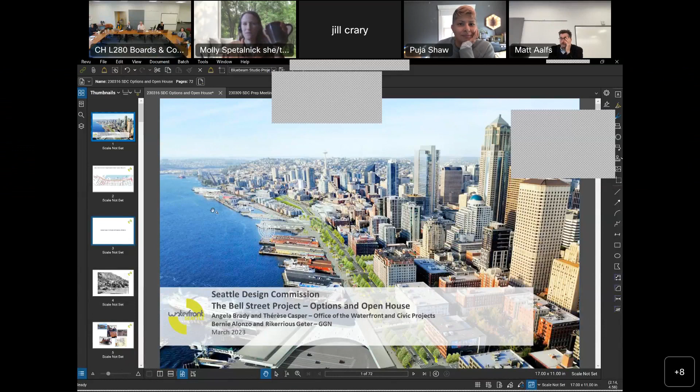And you're a presenter with various access, so you should be able to share your screen. About to do that, right? Says I'm sharing, but do you all see it? Wait, okay, there it is. It just took a minute. The room had to take a pause. All right, well, we can get started.

My name is Rikerrious Geter, and I'm working with Bernie to design some concepts with the community for Belltown on Bell Street. We used this presentation when meeting with the community to remind them this was part of the larger central waterfront improvements, and Bell Street is that last leg, as you see to the far right of the screen.

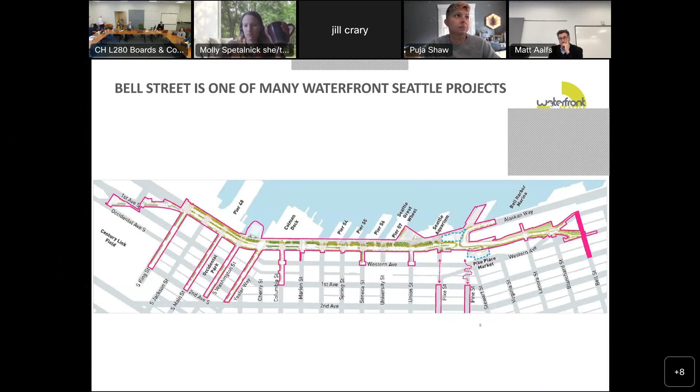GGN started on the project when there was a different framework for what the project might be. Reaching back to pre-COVID times, we interviewed for a place that was also potentially going to take on the portal site and be a neighborhood park. Subsequently, there was discussion and negotiation between the city and Seattle Public Schools, and there's a city-owned parcel that may become a school. While that decision is being made, with maybe a 10 or longer year time clock on it, our project became fully focused on Bell Street from First to Elliott.

One of the things we wanted to start our process with the community was not coming in with prescriptive design ideas, but wanting to hear from them, while also letting them know what we saw as things that resonated with us about the community, about the place, and about Belltown.

Our basic theme is that every place is thick with small stories. The idea is that this place started with humans thousands of years ago, with an active indigenous population that transited from Elliott Bay through to Lake Union, aligned more with where they eventually built the portal, where there was a ravine. This is the beach side of that ravine.

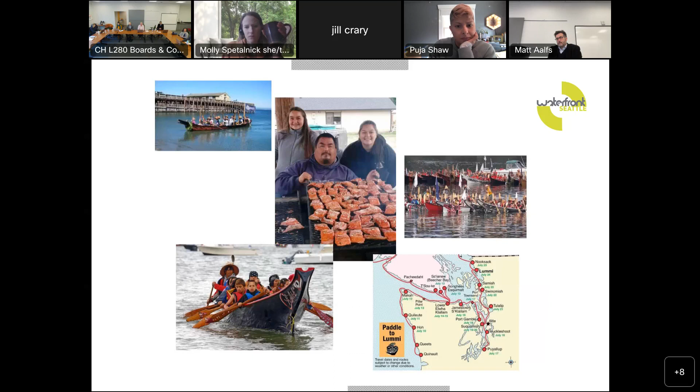As we go upslope, thinking about the modern context of our indigenous folks, we wanted to make sure we acknowledged them and their rich history, and potentially looked for ways to include that history, present and future, in our planning, as that resonated both with existing residents of the Belltown community and indigenous folks. We can get into that more as we discuss some of the design options and elements that may be brought forward.

There was also the history of the viaduct itself, and a passionate group in Belltown really wanted that sign bridge saved. It has been saved—it's in a yard that the Office of the Waterfront, SDOT, owns—and we'll be looking at repurposing and resiting it on the property within the project.

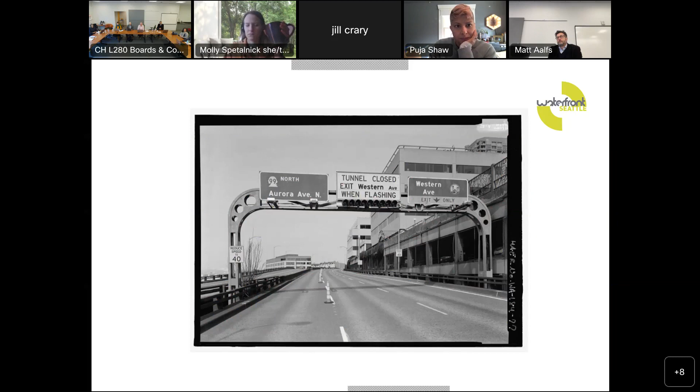There's also a great history of activism. This slide shows some things that were still standing and still up for activism at the time of the original presentation, but there's a wonderful scale and history of community activism and involvement in shaping the future of the neighborhood. There was a residential scale, a very local, human-scaled presence of people in this space, and we always wanted to reach back to and recognize that.

Taking advantage of the fact that we're on the bluff side looking down, but really wanting to come back to the opportunities to connect the neighborhood to the waterfront. As it's turned out, from the community we've heard it's also very important that they feel seen and connected to the activities on the waterfront. They feel that's critical to the vibrancy of the neighborhood and the commercial success, and to rebalance the street daytime and nighttime activities that occur there.

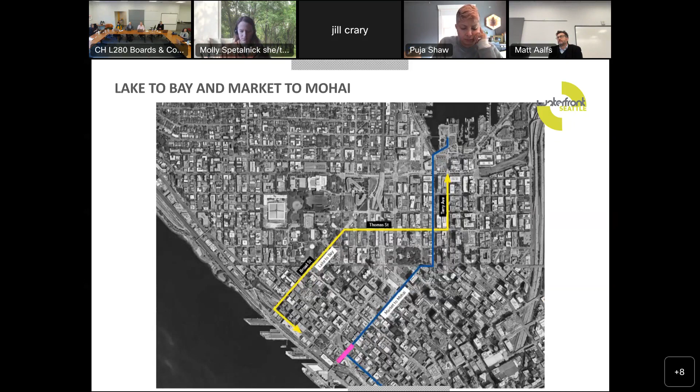These two blocks, particularly the block between Western and First, are on the already developed and evolving Market to Mohai connection. There are other connections real close in the neighborhood. We brought that up just to remind everyone that we can look at two blocks in isolation, but we would never want to lose the context and the possibility of larger connections.

So I would jump into the site overview. When we were meeting with the community, we tried to really orient them to why we are here today. We talked about the history of the Alaskan Way Viaduct and how that in a way separated the neighborhood from the waterfront.

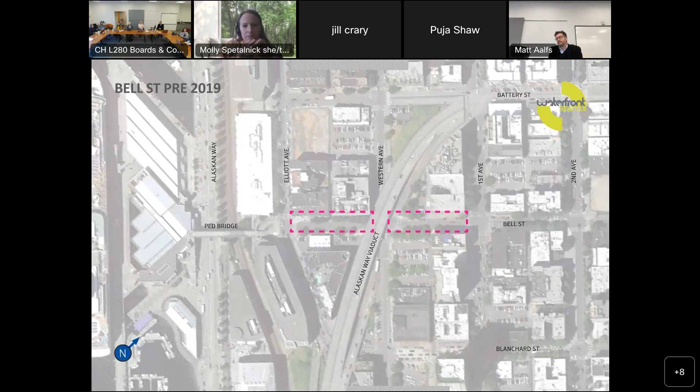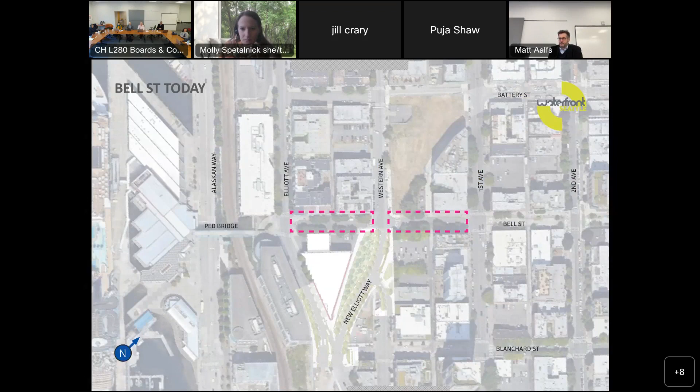The ongoing work with the waterfront is working to improve that relationship down the hill to the water. As we can see today, the new Elliott Way comes and meets Western Avenue at Bell Street, and that creates an opportunity to really make that intersection special. If you're standing further south, you can see that vantage point up and through into the neighborhood. Looking down Bell Street, it's a lot more open.

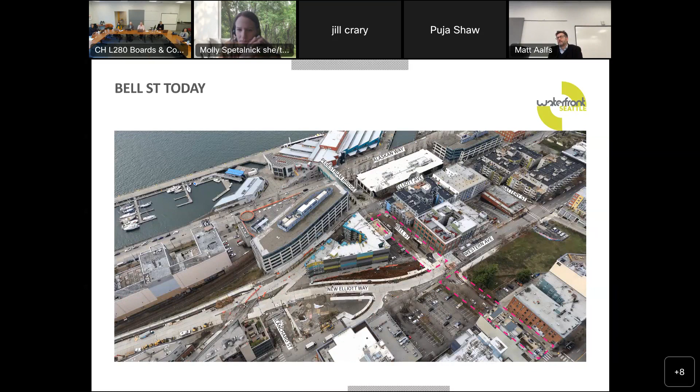We have a little more of an invitation down to the water and Bell Harbor Bridge. We shared this aerial bird's eye view of some of the progress that was current two months ago—there's been a lot more construction since. Ultimately we used this diagram to show the scope of the project and what was within it, what we were looking to improve.

The first thing we did was orient everyone to the circulation present today, because within the scope of the project there is some realignment happening in terms of where cars can go and turn. I could go through this diagram, but I'm sure a lot of you may know it already. Ultimately, this is a two-way circulation for vehicles, and as Therese mentioned earlier, it's turning into one-way to feed Western, which we'll diagram in a moment. In addition to two-way traffic, the right-of-way also has two sides of street parking, so we've got all of that curb-to-curb dedicated to cars.

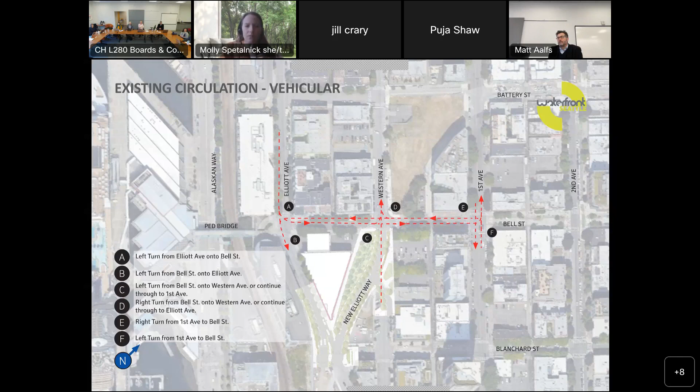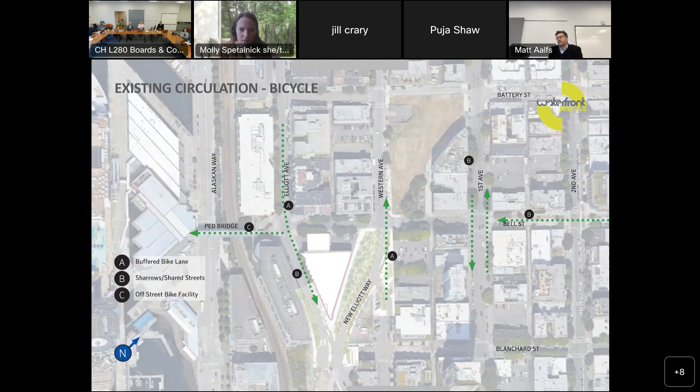Existing circulation includes good sidewalks on both sides of the street and crossings. There's some existing bike infrastructure, whether buffered bike lanes, sharrows with shared streets, or off-street bike facilities, which we're referring to as the Bell Harbor Pedestrian Bridge—showing the biking options within the neighborhood in the context of this street, and how that combines with all those different circulations working together. As mentioned, Bell Street is turning into a one-way street to feed Western, which is a couplet to feed into Battery.

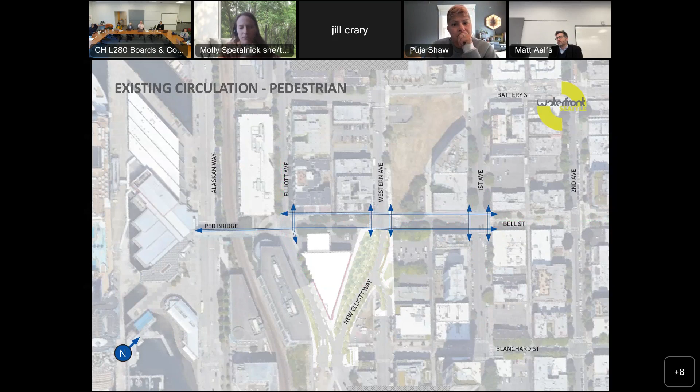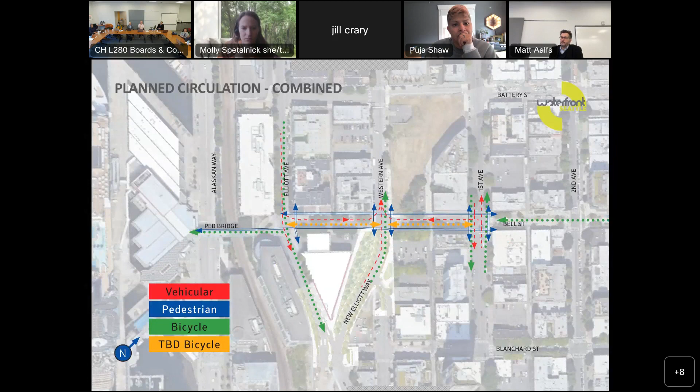So this diagram shows more of the circulation, and as I was just mentioning earlier, Bell Street is feeding into a couplet to feed Battery, which is also one way, and more neighborhood context of circulation.

Can we just add one more thing to that? Sure. So Bell and Battery are couplets, and Western and Elliott are couplets. So there's a lot of couplets going on in the neighborhood.

I think this bigger view of the vehicle circulation is important because there's a lot that's changing south of Bell Street, as you know, with the construction that's underway right now. And there's going to be a lot of change once everything reopens.

It's going to add one more note there. Just keep your eye on the open space that's on the right, on the east side of the triangle shaped building.

Our design proposals want to take advantage of the fact that there's a 120 kV Seattle City Light line there. That will keep that from being a future development site.

Karis will get into the development potentials around here, but if you haven't walked this transect in a while, even if you think you're familiar with this area of Belltown, with the viaduct down, with the portal tunnel bridge in, and all of this starting to come together, it is so fundamentally different than it has been. It's really hard to understand.

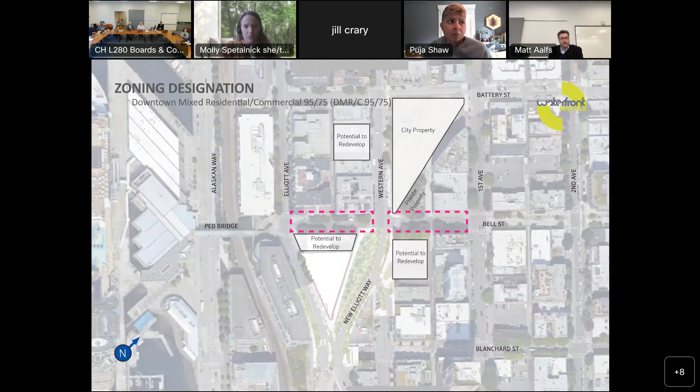We wanted the community to take into account the rare mature street trees that Bell Street has here. There aren't many streets in Belltown or downtown Seattle that have this quality of street trees, and so that was something that we thought the project would want to protect.

In addition to the pedestrian level street lighting, not many streets have that. As Bernie mentioned earlier, the historic sign bridge structure, looking into how we can incorporate that onto the site via a gateway into Belltown, to help pull pedestrians from the waterfront to go into Belltown and explore more about it.

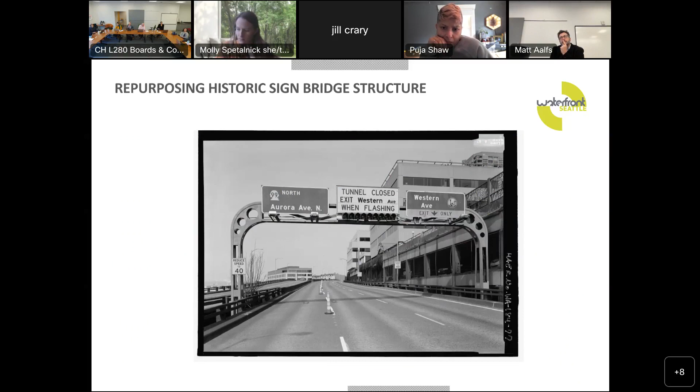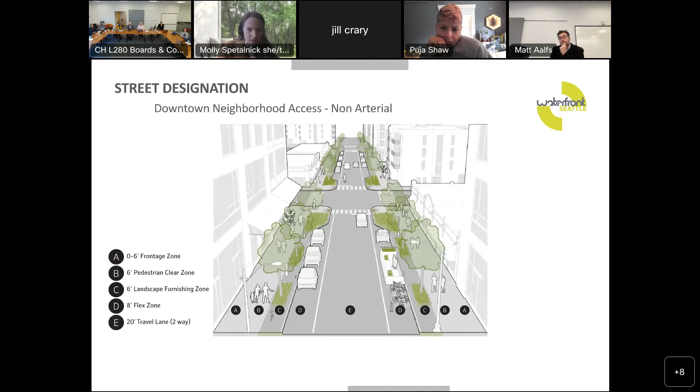We also reminded the community of how the street is designated. So it's downtown neighborhood access, non-arterial, which sets the widths of sidewalk, furnishing zones, and flex zones.

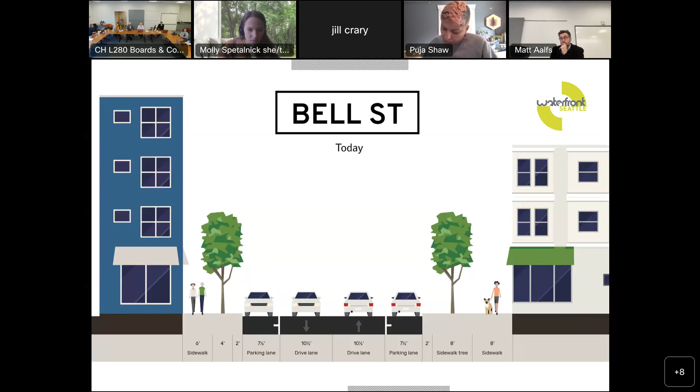We used a few sections to help illustrate what we were trying to achieve. Today Bell Street has a 66-foot right-of-way, with parking on both sides and two-way traffic. We're looking to reduce parking and a travel lane. We showed them that you could get 20 feet of additional space with those improvements, and if you remove parking from both sides and remove a travel lane, you could get about 26 feet. The community really liked that.

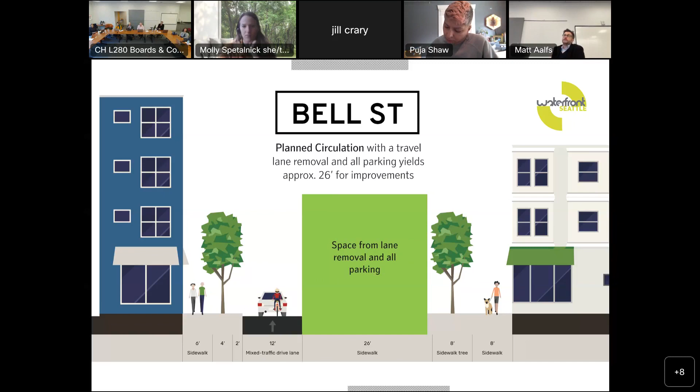Obviously, they wanted to see no cars on the street, but the options we studied were a combination between what you see on the screen and this one. Not everyone wants no cars — we are hearing that strongly, but it's good to recognize we also have people, including some who live on the street, who were at the Belltown Community Council meeting, who want to make sure they can get out of their parking garages and allow for some load/unload on the street. So we're getting a lot of desire for less room for vehicles, but also a recognition that there needs to be some circulation for vehicles.

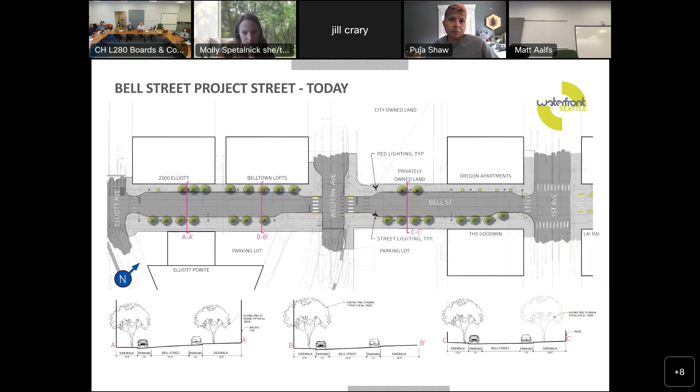Just to have a point of comparison, we are showing Bell Street today, as you can see — a 66-foot right-of-way with parking on both sides of the street and two-way traffic.

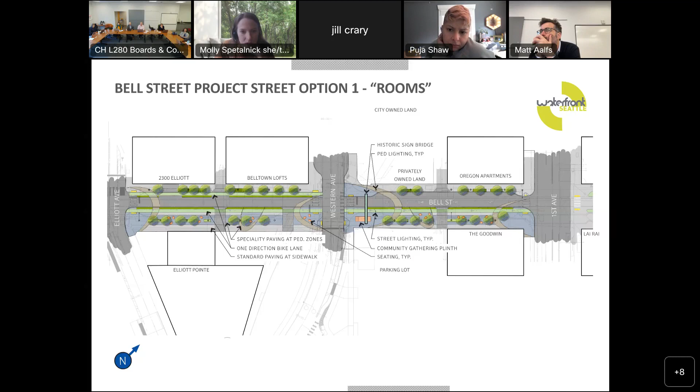Just as a reminder, from First to Western is downhill one way, and from Elliott to Western is uphill one way. So we see a climbing lane is necessary, and we're functionally working with SDOT cycle experts who located the downhill segment for that second segment across the street on the north side. In that instance, we have another option as well.

While we're talking about the steepness of the streets, we heard regularly from folks that this isn't the steepest street in Belltown, but it's also not the flattest. And as a connecting street to the waterfront, there was a group of folks that really wanted us to focus on design for the elderly.

As Ricarius said, it's not really within the scope of the project to regrade it to modern ADA standards. But what they asked for were moments to rest, which explains some of the seating up and down the slopes, and also to integrate handrails. That'll be common to any of our design solutions, but we haven't gotten to the point of detailing those. I just wanted to highlight that.

This option also shows a planted buffer between the bike lane and the street. We intentionally left it off the second option, which you'll see next, just to see how the community valued a planted buffer versus a raised buffer.

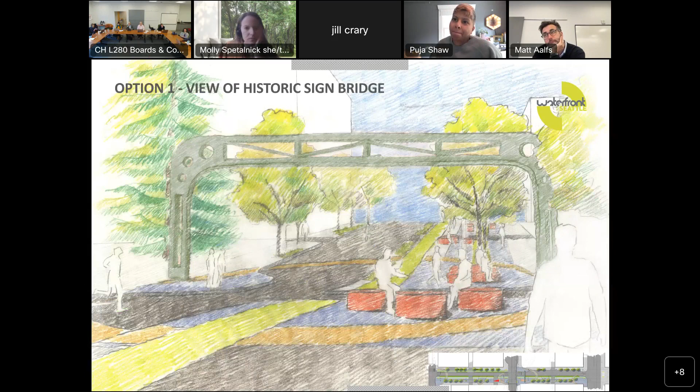And here's a hand sketch of that community gathering room at the intersection, really highlighting that historic sign bridge. When we were meeting with the community, they were pretty excited that we were showing this. There's enthusiasm about, oh, can we light it? Can we put a big sign on it that says, 'Welcome to Belltown'?

Because a lot of what we heard from some of the business owners was, how do we pull people from the cruise ships into Belltown, come to our shops, come to our restaurants? How do we create an invitation? This project will work with the waterfront to continue that wayfinding signage program that exists, so we think some of that will also help people move up the street into Belltown.

We also heard comments from the community meetings asking why we put all the attention on the southern side of the street, since most of them walk along the northern edge. That made me think maybe we should do more seating also on the northern edge, just to balance the two sides of the street. But we will look more into how we can achieve that.

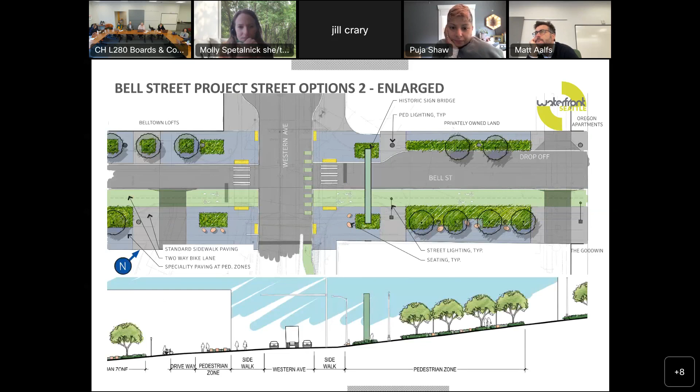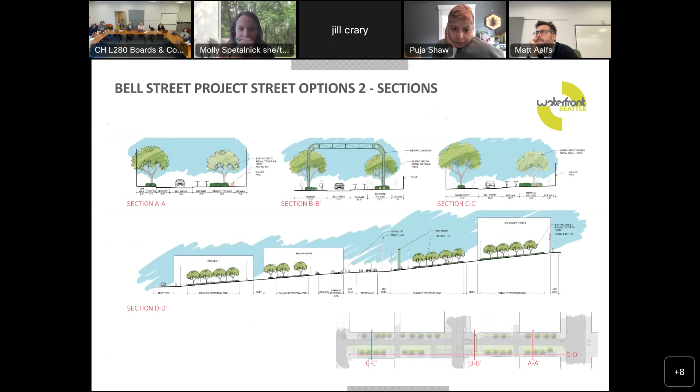And here are some of those views, what they will look like. I think this view when people saw it, they were like, oh yeah, this makes sense—I think this was when they understood how they would use this versus the other one.

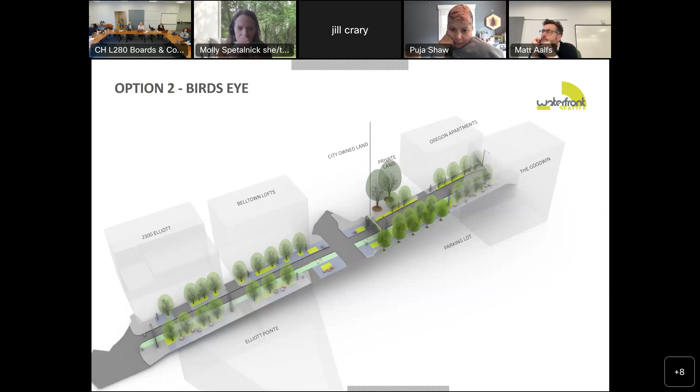The axon view, a view from the Bell Harbor Bridge, and a view of that central intersection zone.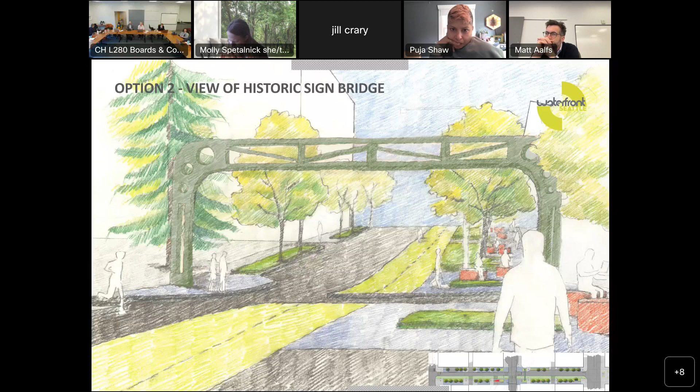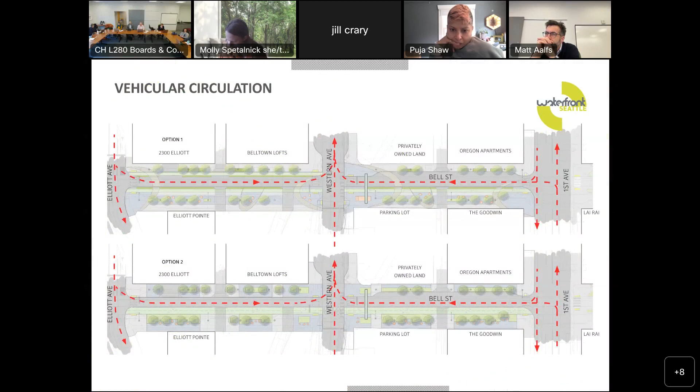Just to recap, vehicles circulate one way on Bell to feed Western up to Battery as couplets. We are enhancing pedestrian circulation. In option one, on the southern edge of Bell Street, one could walk along the building face or along the bike lane face, so we're increasing that circulation.

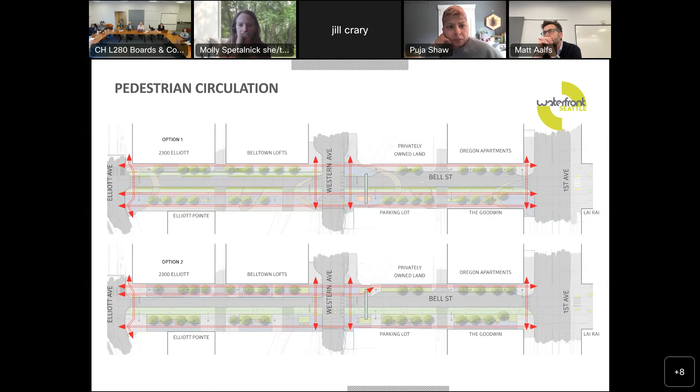In option two, since we're widening the bike lane and widening the planting, the southern edge of the street only has walking along the building face, and on the northern edge of the street we kind of double that—you can walk on either side of the trees and planting. This shows the general increased pedestrian space that the options provide, and it's generally pretty much equal.

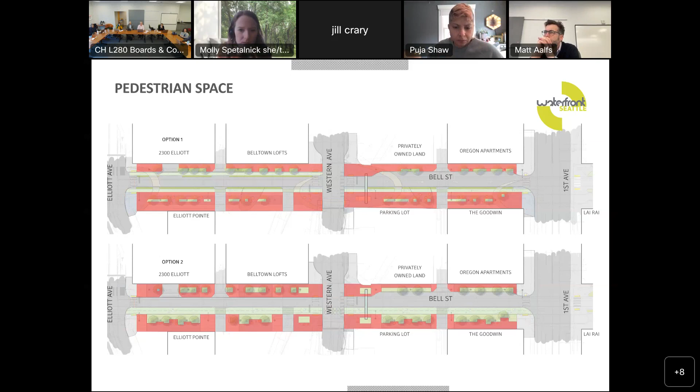As you can see in option two, there's a lot more planting being offered, which was also a theme we heard from the online open house—that people generally like to see more planting. Both options show an increased amount of planting, but option two just shows a lot more.

This diagram is showing seating. We're showing small gatherings of seating because we were trying to figure out if people wanted individually dispersed seating or these larger seating moments where a lot of folks come together. What we heard was a balance, or a mix, of both.

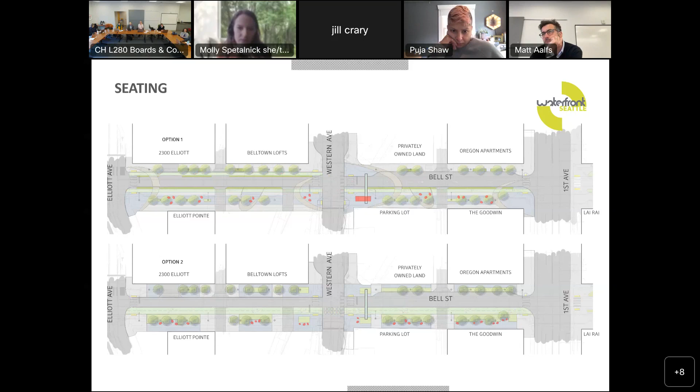Looking at the sun study for the spring equinox, most of that sunlight is in the intersections, because there are no buildings or large trees blocking it. That's consistent in both options since that's just what the sun is doing—it doesn't really impact that. For the summer solstice, you can see a little more sunlight popping up on the northern edge of the street. For the winter solstice, there's less light, as we'd assume.

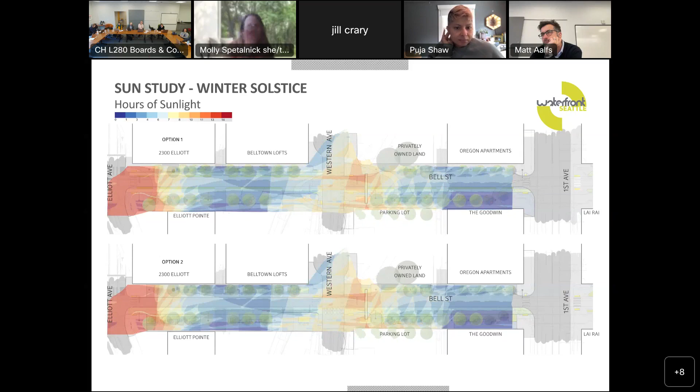So in summary, we paused here to get a read on what the community was feeling. A lot of them felt like both options were addressing their priorities. We did hear, as I mentioned, a stronger desire for the two-way protected bike lane. They understood that grading revisions aren't really feasible.

We asked if lighting the seating was important, or if lighting the sign bridge was important. They mentioned that lighting the seating was more important, because it's tougher to install seating and then change your mind about adding lighting later, versus the sign bridge—you can come back later and add lighting to that.

What else did we hear? Well, we have a summary that covers that.

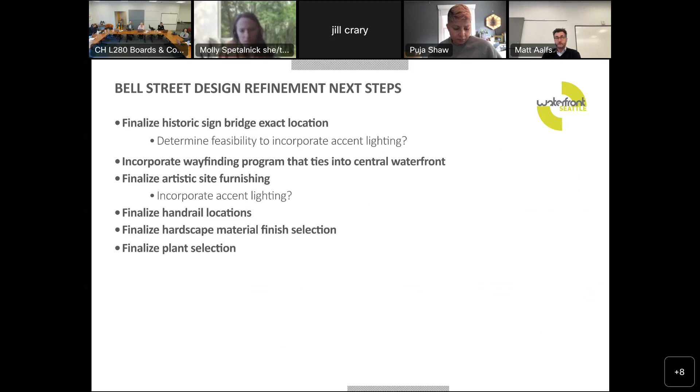So next steps are to finalize the exact location of the sign bridge, determine the feasibility of incorporating accent lighting, incorporate the wayfinding program that ties into the Central Waterfront's program, finalize the artistic site furnishings, finalize handrails, hardscape materials, and plant selection. And then there were a few questions that we asked.

We asked: do you feel like these concepts reflect your priorities? Then we reminded them what we heard—more space for pedestrians and cyclists. Our concepts show bike lane options, whether a two-way protected bike lane or a shared bike lane with a planted buffer, plus different seating configurations, gathering spaces, and additional greenery.

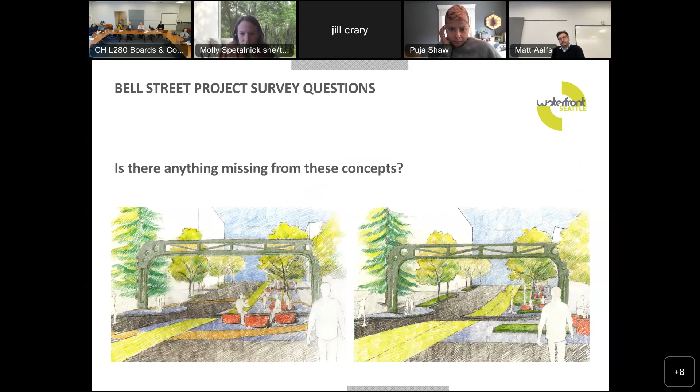And then we asked, was there anything missing from the concepts? We had our meeting with the community on March 8th, and we're still receiving feedback, but so far we've had 210 responses, and 50% feel their priorities are reflected.

Majority of the comments that say their priorities aren't reflected come from those who feel they don't want non-local cars on the right of way, on the road—that contributes to the other 50% who feel their priorities aren't reflected.

51% of people say they'd like to see pedestrians prioritized more. 33.8% think the balance is good. 15% would like to see cyclists prioritized more. A majority want more greenery. 63% prefer a two-way bike lane. And people rated the gathering space highest, 3 out of 5.

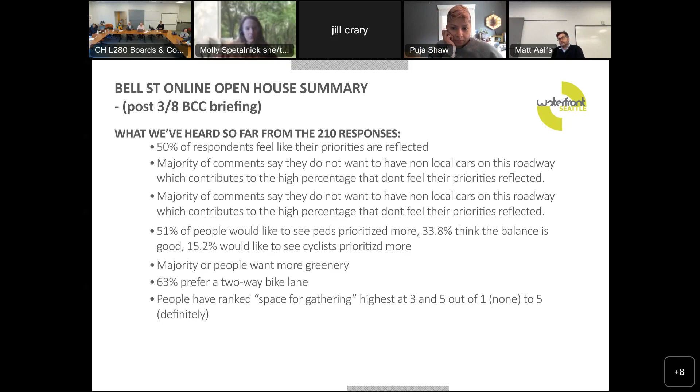Suggestions for what's missing included: a playground—though we probably can't do that in the street—interpretive signage, bike racks, accommodation for dogs, more lighting, and handrails. We heard there's too much impervious pavement, and folks wanted clearer options for scooters, meaning parking for the scooters you can rent.

So our next steps were to present to you today, refine the concept based on the feedback we've received from you all and continue to see from the community, and provide an update at a future community council briefing, which hasn't been scheduled yet.

We're thinking August. And then I thought we were thinking June. That's right, June, that's right. We thought August was too late. They said August—I'm like, that's too late, right. June. And we plan to reach final design in late 2023 and start construction next year.

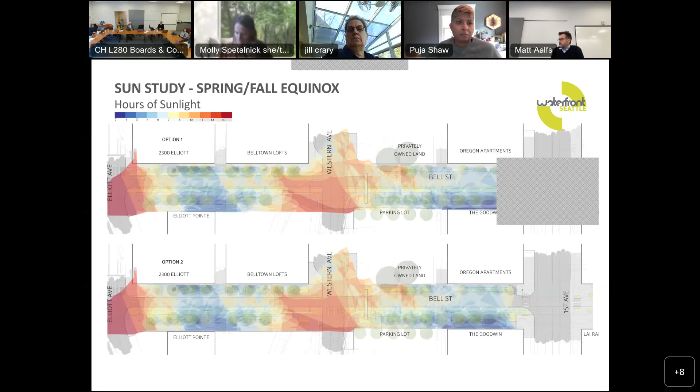Is that something that you would, actually this is kind of an overlapping question, I'm wondering how long your community involvement will occur, and is there something about seating? It seems like seating interests me because for so long, and especially in Belltown, seating has been separate, kept away. I'm really thrilled personally and professionally that you're concentrating on seating, and I also think it's a challenge, it's a strong element of what you're up to. So is this something that the community could stay involved with going forward? Because there is a history of that in the neighborhood as well.

I'm not sure exactly what you mean when you say the community being involved going forward with the seating, but I think as we define, we'll get more specific about where the seating could go. And so yes, I think that would be something we would definitely want to do in consultation with the community.

I mean, we heard that same tension at the Belltown Community Council. I think people want seating, but then all the seating got removed between 1st and 5th because of what was happening. Especially as we're coming out of COVID and people are out and about more, I think it's always a tension and something we have to be strategic about. But we don't want to not do it. So I don't think you will see as much seating as what is in the concepts. I think we put all the opportunities on there, but we will scale back and be more strategic as we move forward with the design.

But once we've developed a concept and advanced it a little bit, we will go back to the community, and then we'll probably go back again towards the final design. So that's our typical community involvement process.

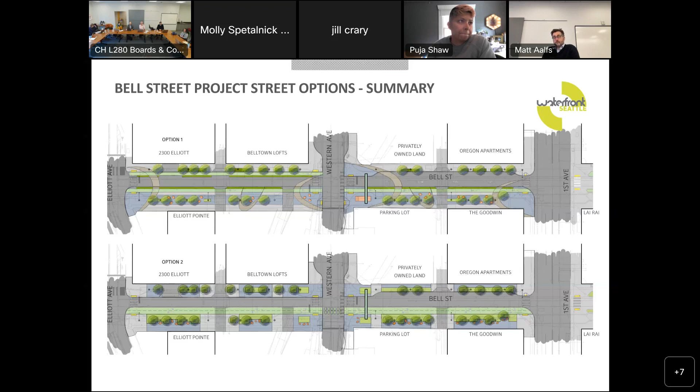When you say an entrance, are you saying an entrance at First or an entrance at Elliott? Either, but I think more so at Elliott, that you would be entering into sort of this continuation of a Bell Street experience. Yeah, I guess I would say I don't see that there's just one entrance, because if you look at that diagram, part of it is there's streets that now exist. They've now been built and they'll be opening soon.

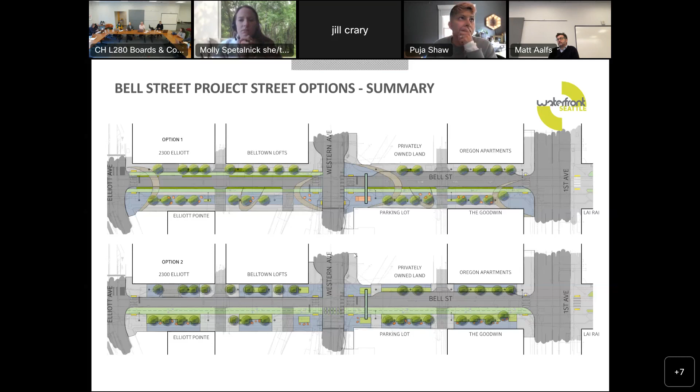That new connection on Elliott has never existed before. And if you walk down there today, that really feels like a grand entrance to Belltown, to me at least.

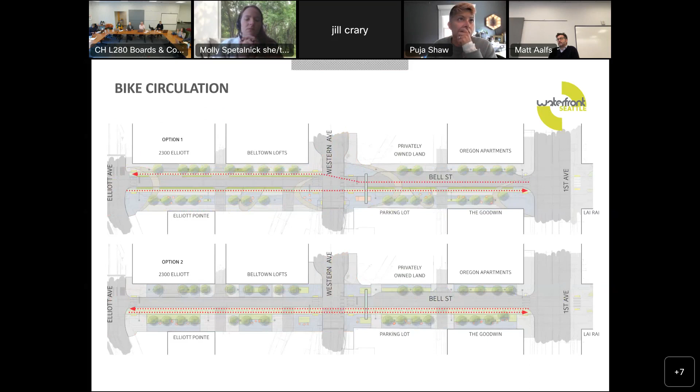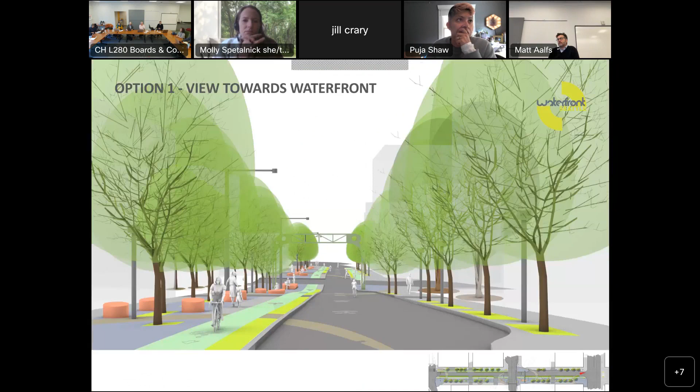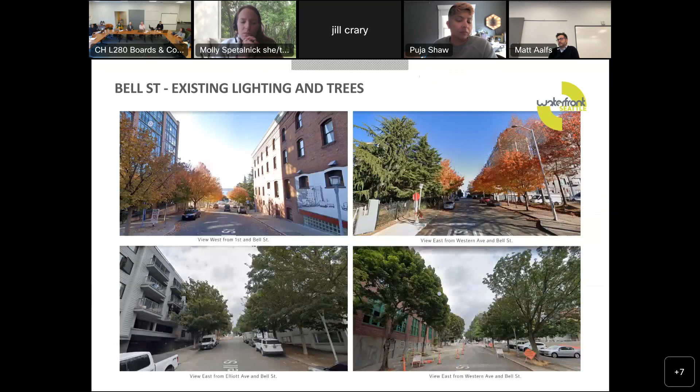So I hear what you're saying as far as it feeling like it's mid-block, within the two-block area. But I think if you're coming from Pike Place Market, that is actually where you'll be coming from, and there's a real desire from the community to draw people from Pike Place Market to Belltown. That would be Western and Elliott, that new roadway, where people would be coming from. So there's multiple entrances and multiple ways that people would be coming to the street.

That's the pedestrian-focused one. That would be alright, that was gonna be your answer.

You can see there's a lot of new bike infrastructure that also goes past there. And it's an area where that side of the street, the foundations avoid the Seattle City Light underground transmission line, so that's a more tabled area. When you go up to First, it does present a great end view if you're on the other five blocks of Bell Street, and then the road breaks down away from you. But it's right at the edge of that precipice — the street and sidewalks fold down very quickly from that intersection. So as it moves just a few feet, it's moving down at 6%, versus as we pull it up from the Western intersection, it moves up in prominence.

Part of this too is to get it to the right height, so in addition to needing vehicle access for the driveways and alleys, emergency vehicles still have to be able to use Bell. We need clearance over that, which I believe is 13.6 or 14 feet — I'm sure we've got a civil engineer who can correct me precisely — but we need to get it high enough above the roadway there.

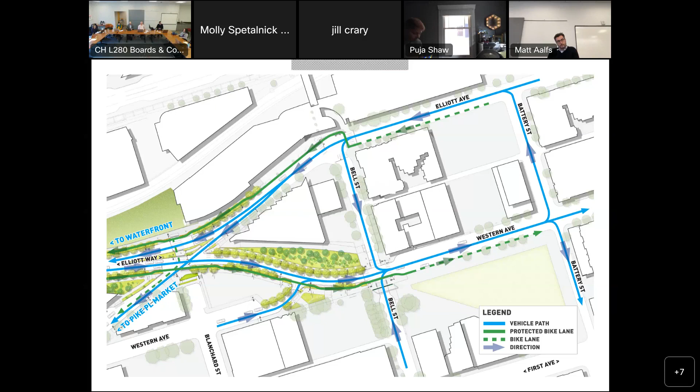It's just so hard. I was actually talking to someone recently, and we all go to other cities, and other cities have all of these things, and then we come back to Seattle and we don't have them, and it's like, why can't we have nice things, right? So I think it's a valid concern and question, and I think we're just trying to see what the interest is and what is something we could do, while also not completely ignoring the issues.

We should be able to sit out there and enjoy all this new infrastructure, the sign bridge, and the view. So we're hopeful that we can come to a solution that is a balance.

It's great, and I appreciate it. You've got to start somewhere, so it was more just the great answer.

I had one kind of odd question. You said nooks and crannies, and then you said you shouldn't say crannies, and I was wondering what a cranny was. Yeah, I think I've heard my grandmother say that word. Muffins have nooks and crannies, right? Yeah, I was wondering if I wasn't supposed to say that. I think my reaction when he said that is, when we're talking about safety, talking about nooks and crannies is probably not good framing. Bad guys are in the nooks, exactly. Okay, fair enough.

Anyway, thank you, I'm excited to see it develop. I don't have any questions, I just reserve for comments.

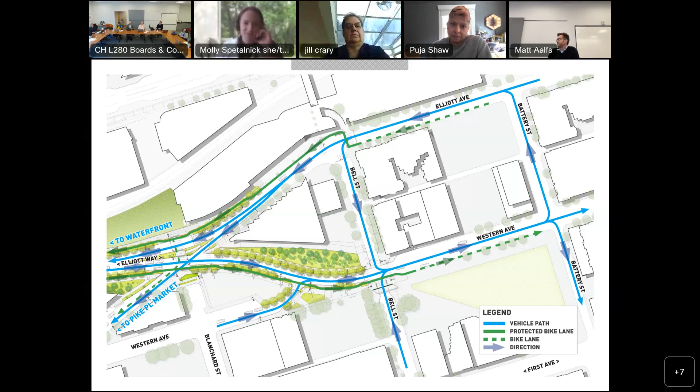So I just have one question, a quick follow-up to the curbless question, because I had the same question. This might be hard to answer, but in terms of your public outreach, was there a strong preference to pull any design elements from the 5th to 1st section of Bell into this new section? Or do people in the community really see this as a separate project or separate section?

We did hear one comment about the diagonal scoring in the pavement, to pay homage to what is happening between 1st and 5th Avenue, continuing that vocabulary down so there's some continuity between the two. But from my perspective, the community understands that they are different: one is a lot more flat and more gathering-focused, the other is more steep, more about circulation with opportunities for seating. That's my take, Bernie.

I agree with what Ricarius just said. I think, like any test case, mock-up, or model, what we heard a lot was pay attention to the lessons we've learned as a community from these first 5 blocks and do what we can to not repeat those. If we're going to do seating, let's figure out a way the seating can work but not encourage crime. Figure out how the planting can be lush and green but also not support crime. They were really concerned about having to take out otherwise healthy plantings because people were stashing drugs in them while doing deals close by. We're not able to fully design out any behavior, but for everything we can learn from those first developed blocks, we really do want to pay attention to the lessons learned.

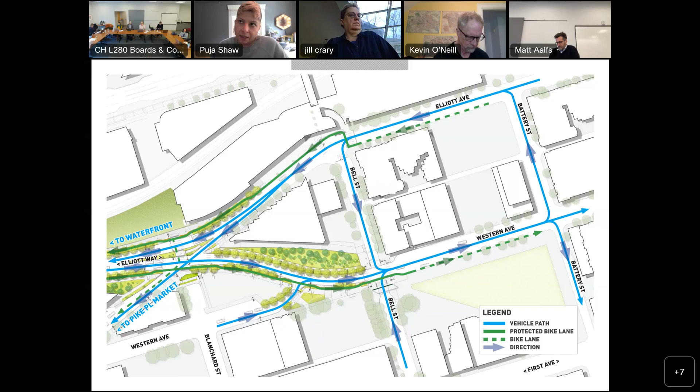Thanks for that presentation, it answered most of the questions I had at the beginning, so that was great. Ricarius, you mentioned at one point a planted buffer versus a raised buffer between the bike lanes and traffic, and I was wondering what you meant by the raised buffer.

Yeah, so it's basically a curb. This bike lane is separated from the street by the curb. So there's a curb in both options, but the curb is the only separation between bikes and traffic in option 2. That's correct. We can obviously tweak this to add planting to that outside edge between the bikes and cars, but we just want to see what the community values.

And on that point, moving a curb line for 2 blocks is a really expensive endeavor with all of the other elements that it would require. So until we've had a chance to more fully develop and prioritize the budget, yes, we could move the curb, but that may not be the highest priority for the budget.

What we heard really clearly was give us the best separation you can get between vehicles and the bike lane. If that's a curb, then great, that can be the priority. But there are other ways to separate and provide protected bike lanes that may be a better balance given the low volumes of traffic. This isn't Second Avenue, where you have a full 3 feet dedicated to raised planters and all of the cones and supplemental striping that's able to support that. But I don't want to back away from trying to deliver this as a grade-separated bike lane if possible, we just know that has a cost we're going to need to evaluate.

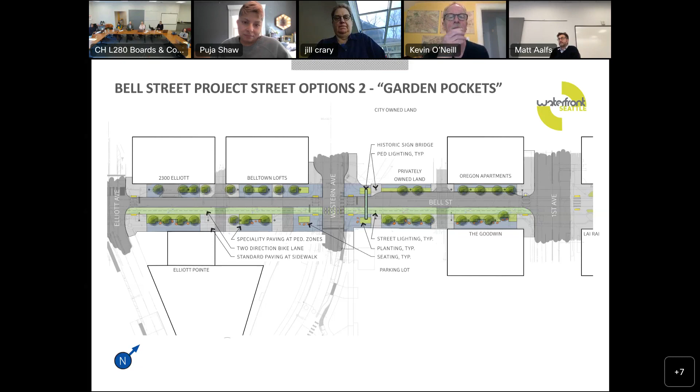Thank you, and I won't be here for the comment part. Thanks, Jill. Molly? I thank you for answering many of those questions throughout that period and for the great presentation. I will wrap outstanding questions in with the comment period, so I'll go ahead and defer.